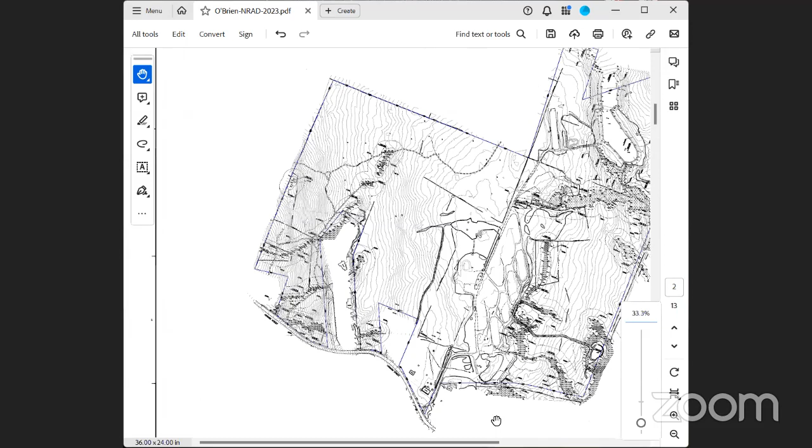Essentially, there was a prior ANRAD issued by the Conservation Commission a long time ago on this. The ANRAD had expired and was never extended or renewed. The applicant had all of the prior flagging by Charles Caron Environmental rehung and submitted an application to simply have the wetlands recertified again. That's basically it, not much else to say. I'm assuming the commission would probably want to walk the site.

The commission has walked the site, or at least some of us have. I went out with Bob last week, and then again with Rich Tremblay over the weekend. I didn't see any flags anywhere. Really? Because I know they were rehung. Yeah, I didn't see any anywhere, and we walked pretty extensively around.

Okay, so if you guys weren't able to see the flagging out there, then perhaps I should ask the commission to do another site walk. I'll make sure that Haley Ward has all the flags. They went out and survey-located all the flags and rehung them, so not sure if anything happened to them or not, but I can make sure that happens.

The only other thing I would point out, I was provided with the prior ANRAD issued from the last time, and that was quite a while ago. There was a certification on the headwaters of the Mulpus as a perennial stream. The applicant is not asking for anything to do with riverfront on this one, simply just the actual wetlands themselves. Anything to do with riverfront or the boundaries of said riverfront would have to be handled under a notice of intent if there's any type of construction proposed within 200 feet of that stream. So that is actually not part of this.

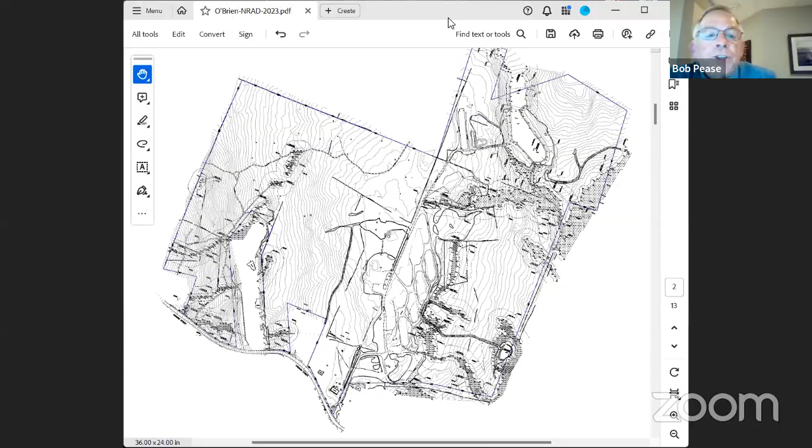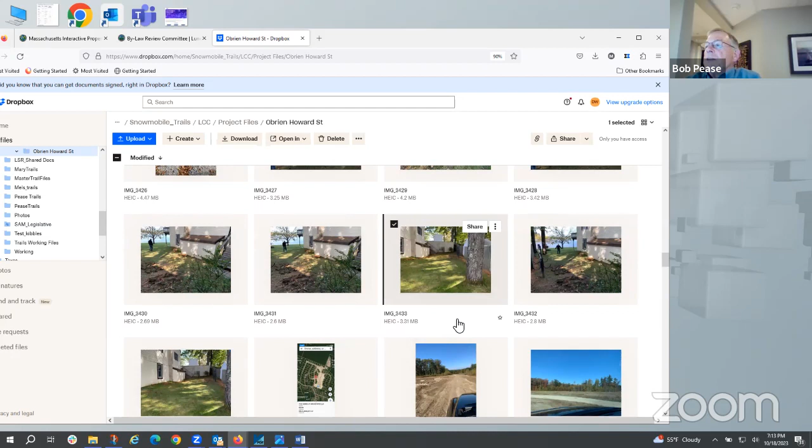At that time we did not have a conservation administrator, so I reached out to Mia McDonald at the DEP, our DEP circuit rider, for advice and guidance. She advised me that the flagging should all be rehung so that we can double check, given that while we have interim administrators now, two interim administrators, we still do not have a full-time wetlands agent.

She advised that we should ask for a third-party review of the wetlands. I just want to bring that to everyone's attention, that I did reach out to the DEP because we did not have a full-time administrator, and that was the advice from the DEP.

In walking the property, you can see there's been a tremendous amount of vegetation removed. The topsoil's been stripped off in a lot of places and separated out so you can see where there's large piles of boulders from screening operations, and you can see where a lot of soil has been transported off the site. Let's put it this way, there's soil that's missing, and I don't see it deposited on the site, so I have to assume it was transported off the site. But that's an assumption on my part, it would need to be verified elsewhere. I think there are some very significant issues here, and that's what I have to say at this time.

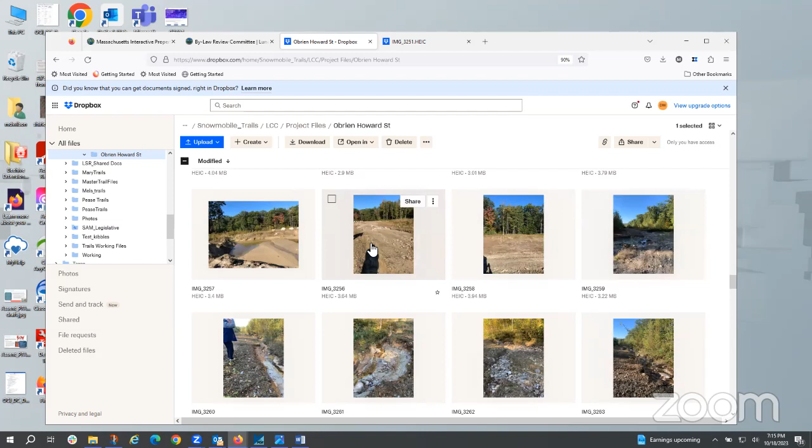While you were talking, I was showing some of the photos. I guess I could make it bigger, and I can show full screen any of these photos anybody wants to look at. Here we have a commissioner showing the scale of the erosion problems. There's just a lot of earth moving down in there that really seems to be uncontrolled altogether.

Yeah, and there are piles of soil, several piles of soil, that have no erosion control, and you can see the ruts coming down the sides of it as well. Yeah, here's that pond that's the headwater of the Mulpus Brook.

Looking for my Saturday photos. Here are Bob, my Saturday photos as well.

Rich Birch has his hand up, Mayor. Ah, Rich, yes, floor is yours. Rich asks: when you were out on site, was any of the erosion into the buffers or the wetland?

Well, I'd have to go back to when the wetlands were flagged to answer that, Rich. It certainly looked that way to me. There's like a berm that the applicant built along the entire western perimeter of the property, and there's also a berm along the eastern side that prevents water from leaving the property until it gets to a certain point. If you look at the wetlands map, it shows wetlands running through the western perimeter. So based on that, I'd have to say yes, that there was erosion through the wetlands.

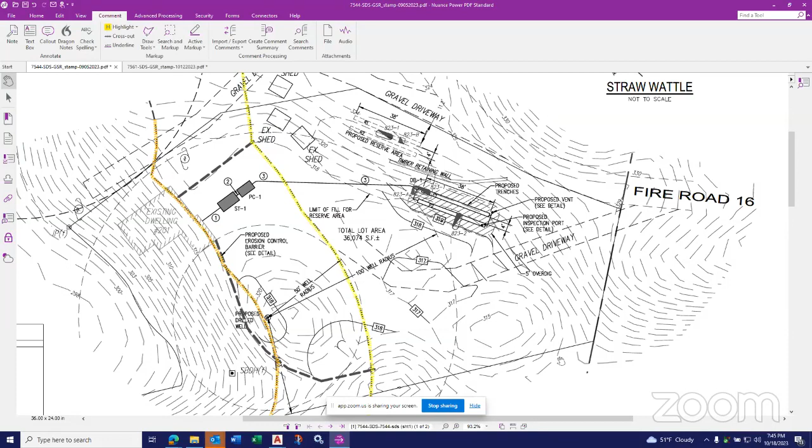Yes, well, this is an existing property. Existing house number 201 is located here. This is off of the end, near the end of Fire Road 16, if you're familiar with that area, right near the Shirley line, which is this line here. And the railroad tracks, the commuter rail, run right through on this side of the property, so it's kind of isolated by itself. There is another house located just to the northwest over here.

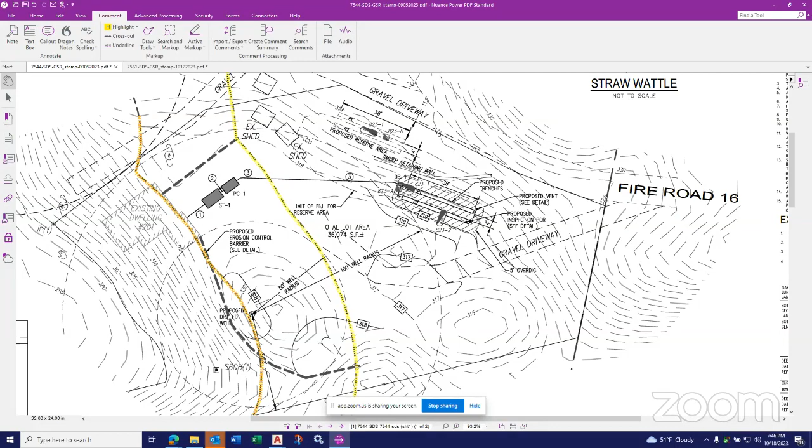The proposal is for a new septic system to be installed up in this area outside of the buffer zone. However, as part of this work, we're going to install a new septic tank and pump chamber in this location with a new building sewer coming out of the house. We're also proposing a new well located in this area. All of those items are within the 100-foot wetland buffer zone, so we've shown an erosion control barrier around the area to encapsulate the work area and prevent any erosion from going down to the lake, down in this direction, which is the cove end of the lake, right in that southeast corner of the property.

So the work's going to involve taking out whatever existing system might be in this area, installing a new tank and pump chamber and the piping, and a trench going up to the leach area, with some removal of a mound of soil here. This is the only location we can put the well and meet all the required offsets, so we had to put it here, and in order for a well machine to get there, they're going to have to knock that hill down so the truck can get in. It's just too steep and too pointy at the top for them to work in that area without excavating it out, and like I said, erosion control around the whole area. So it's really a minimal amount of work. If it wasn't for removal of the mounded area, there would be almost no real site work involved other than installing the tank and pump chamber.

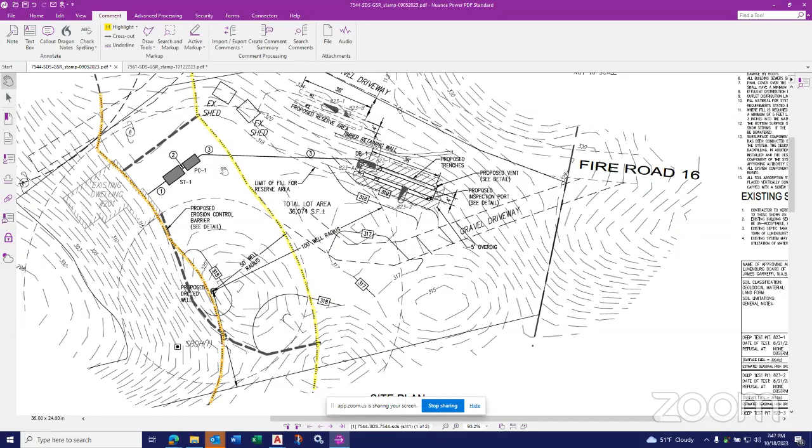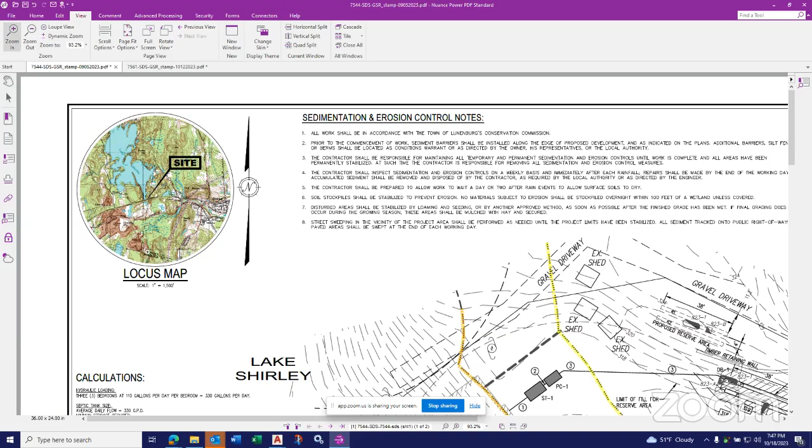Where is the lake on this drawing? The lake is over here. The edge of the lake is right near this 298 contour in this area, almost off the sheet. We should probably open up the viewport a little further to get the edge of it. The lake makes a pretty sharp corner here. We are right in this very corner, the southeast corner of the property, the very last property there. You can see the railroad tracks come by right here, so we're right in the very corner of the lake.

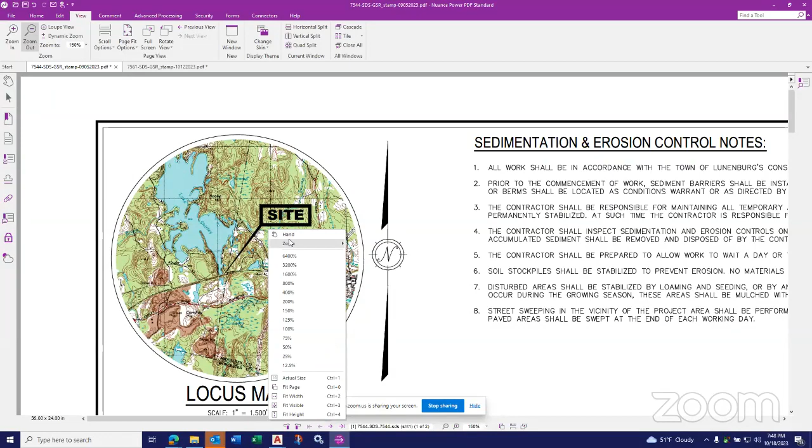And so the two lines that you had shown in yellow on your plan, those were the 50 and the 100? That's correct. The yellow is the 100-foot, and the 50-foot is the orange.

No work is proposed in the 50 between the 0 and 50-foot, except for some grading in this area to level it out. We did have to get into there just a little bit, in order to level this hill down so that a well truck can get in there and put the well in.

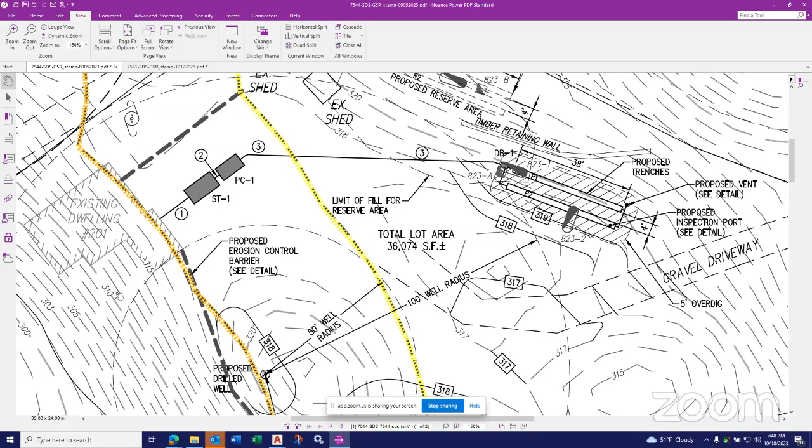Okay, are there any trees or understory bushes that have to be taken down to place that well? Yeah, there are a couple of trees near the top of this mound that would have to come down. I'm not totally sure of the size. The owners are here attending the meeting; they could certainly clarify any number or dimension of trees located there.

Madam Chair, hi, it's Butch McGurn. How are you tonight? Hi.

So as he's indicating, there will be trees to come down on that mound. And I would guess, just a rough guess, maybe over 2 inches, ranging from 2 inch up to probably even 12.

Okay, thank you for that clarification. And there didn't seem to be any designation on the drawing about the trees impacted within the buffer zone? No, unfortunately, at the time the topography was shot, no one was aware that mound was going to have to be removed to put a well in that location, so we didn't obtain the tree locations. Again, we don't typically locate 2 to 10-inch trees; anything under about 10 inches you wouldn't typically locate unless specifically needed.

Understood. Rich, thank you for that. That's actually something that was confusing me a little bit about the drawing. It seemed like that solid line that he last highlighted would have been the edge of the lake or the high water mark or the 50-year flood mark, but it's not that. It's the boundary that's shown, a political line, not an environmental boundary line.

Madam Chair, I myself would like to see it delineated on the plan. I have no problem with the project, you're kind of limited in where you can put it, but we're kind of guessing here where the 50-foot line is, if the well is within the boundary or outside the boundary.

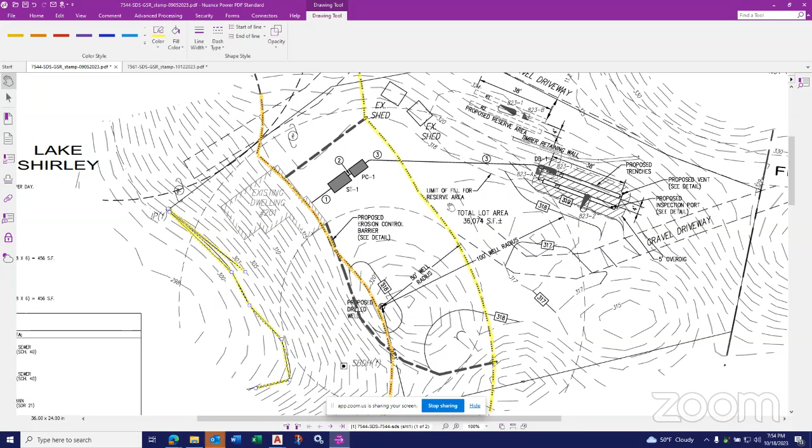Thank you, Rich Tremblay. Madam Chair, thank you. Chris, a couple of questions. Does this map or drawing show us where the existing septic system is? It does not. I'm not sure exactly what's out there, but I think it's a cesspool or something in this area. I don't think there's any known exact location of the existing system.

Okay, what is your plan? Is that going to be removed? It will be removed if it's interfering with the new system, and obviously the Board of Health requires any tanks to be properly decommissioned, crushed and filled with sand and that kind of thing, for safety purposes mostly.

And my last question, around the well, when you're removing all that fill so we can get a truck in there to put in the new well, what happens to that fill? It could be used, it's probably all mostly sand. Certainly they'll be needing some sand around the proposed system area to meet Title V requirements, which that sand probably does, so certainly some of it could be used for there. I don't know what the plans are for any of the rest of it. It's really not that much there, a few truckloads, maybe 2 or 3.

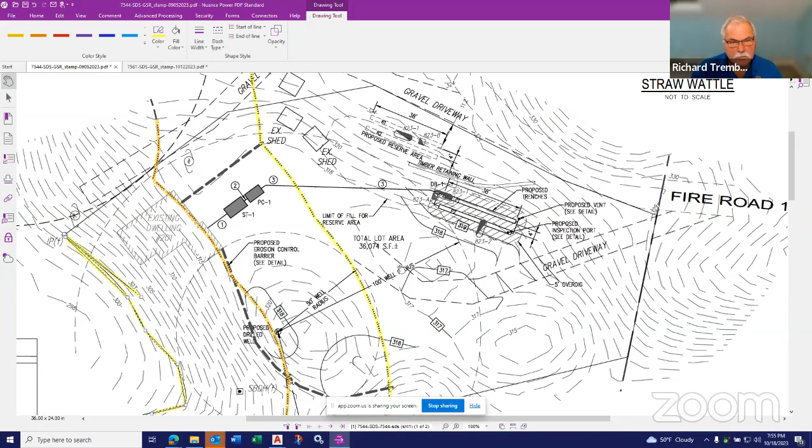Okay, thank you, Chris. Thank you, Madam Chair. Do we have any other questions or comments from members of the commission? Not seeing any hands. Butch and Joanne, you have your hand up?

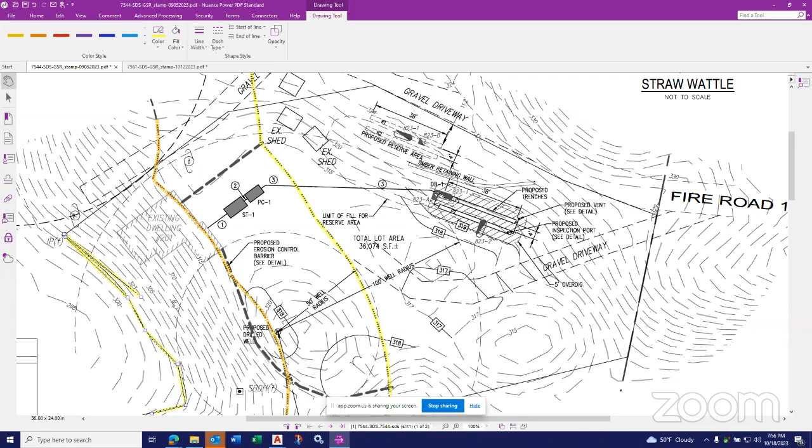I do, Madam Chair. Just to point out, the level of the lake is in fact that heavy dark line that was highlighted. That is in fact the edge of property because it's a retaining wall, an old concrete retaining wall, that delineates the property from the lake. So the lake level at that retaining wall right now is at 2 feet.

Thank you for that. And then to answer Rich Tremblay's question, there is an old abandoned system. There's probably about a 50-gallon barrel that's buried in there, and it does have an elevation out to an old sand trench. It's roughly located at the number 1. Thank you, Butch.

So that has the barrel over it. Is that what we saw this weekend? Is that what you're saying? Yes. Okay.

And thank you for clarifying where the edge of the lake was, but then that really begs the question of why there's still gradient lines below the level of the lake. That makes no sense to me. Well, I can honestly say lake level on the entire town assessor's map is at 300 and the dam spill is at 301. We know that from the property survey that we all did together 2 years ago. So apparently the lake somehow has a void here in your area, according to the drawing.

Anyway, thank you for that clarification. Bob Pease, you have your hand raised. I did. I had the same question you did.

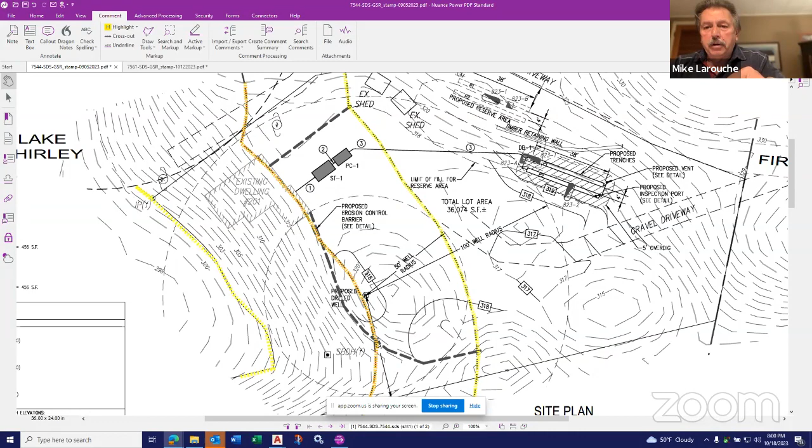Yes, that has been issued. It's 208-1309, and there were no comments. Thank you so much.

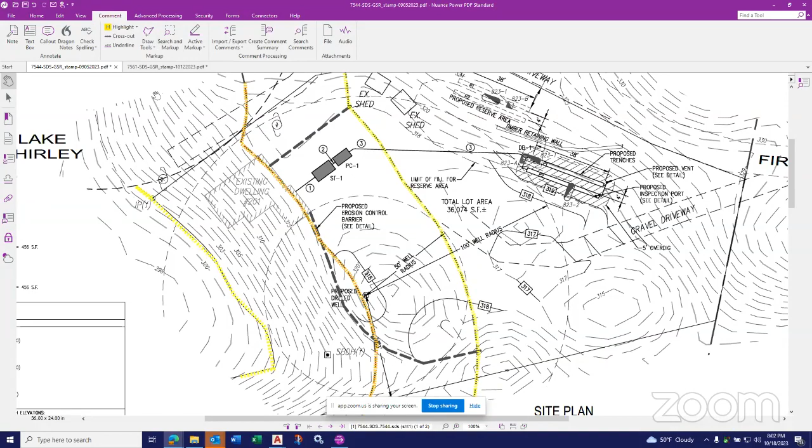The only other thing I'd recommend, since we're sitting at the very top of a steep hill and have to account for all the runoff, is staked hay bales and silt fence, or staked wattles and silt fence. I think you're just showing staked wattles. Yeah, I don't think that'll be enough—I only have the wattles shown, but we can add silt fencing to that. If we can get buried and staked silt fence along with the wattles, that would really offer protection, since we've been in a fairly rainy pattern, and you still have to account for the water coming off once that gravel is opened up at the top of the hill.

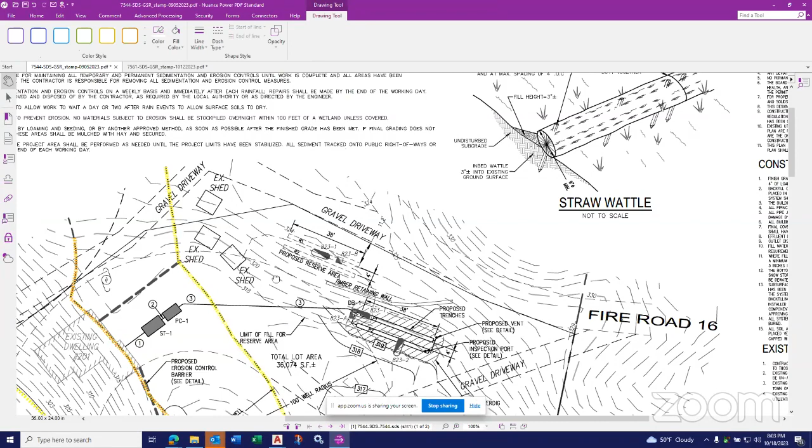Understood. And I brought up the overhead, and the edge of the lake still doesn't really match the way you've got the wall drawn in there, so I'd like to have it rechecked. Understood.

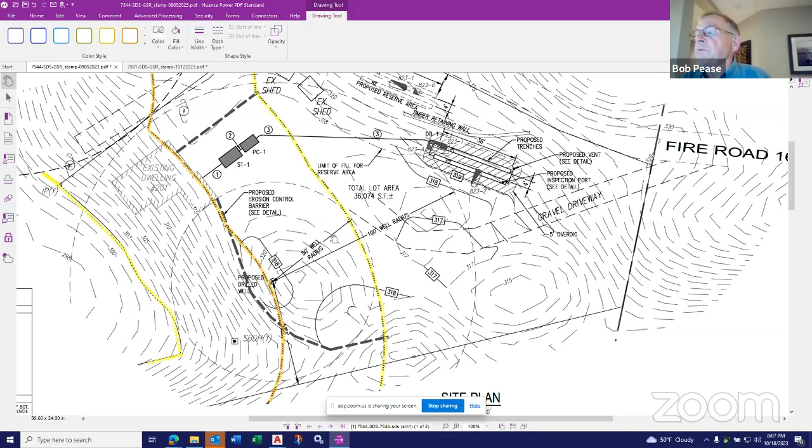Anything smaller than that is more of a sapling, a baby tree. Fair enough, that sounds reasonable in my opinion too, Bob.

I'm going to put it to my commissioners to raise their hand if they have an alternate opinion, and I'm not seeing any. So does that give you some clear direction, Chris? Yes, it does. Thank you.

So will November 1st be enough time to make those updates? I believe so. I'm looking for a motion from my commission to continue this to November 1st.

So moved, Rich Birch. Second, Jeff Viviano. Second, Rich Tremblay. Okay, so I have a motion by Rich Birch and a second by Jeff Viviano.

We'll do a roll call vote. Rich Birch, aye. Mike LaRouche, aye. Jeff Viviano, aye. Richard Tremblay, aye. Chris St. Germain, aye. Bob Pease, aye. And I for myself. Okay, we have continuation to November 1st.

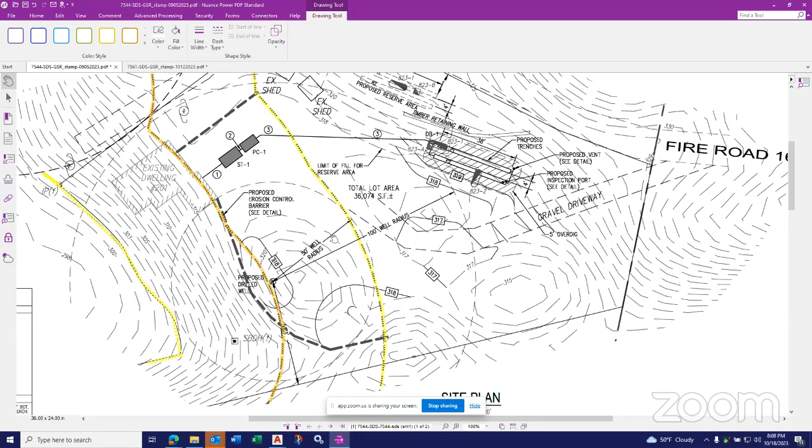Moving along to our next hearing. Pursuant to Mass General Law, Chapter 131, Section 40, as amended on the Town of Lunenburg Wetlands and Municipal Bylaws, a public hearing on a notice of intent by Richard Tremblay for the construction of a replacement septic tank at 386 Sunset Lane.

Madam Chair, I'll be recusing myself. Okay, so why don't you, do you have drawings to share, and do you want to take us through what you're doing down at your property?

Jack Maloney from Dillis and Roy. I am representing Mr. Tremblay tonight. Very good. Do I have permission to share the screen? Indeed you do, thank you.

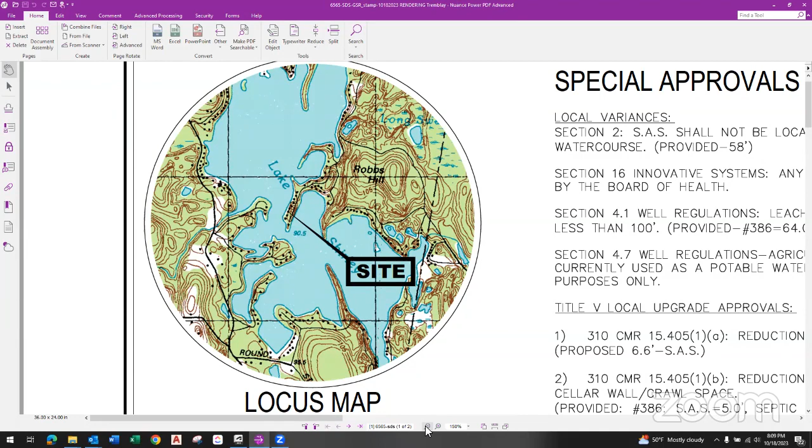All right, can everybody see that? Yes. Okay, so locus map, Lake Shirley, Sunset Lane. We are roughly right where my hand is now, about 4 houses back from the very tip of Sunset Lane. Sunset Lane runs right through the middle of Mr. Tremblay's property, as noted in the gray. Property lines are delineated in pink. Lake Shirley on this side, and we also have Lake Shirley on the other side.

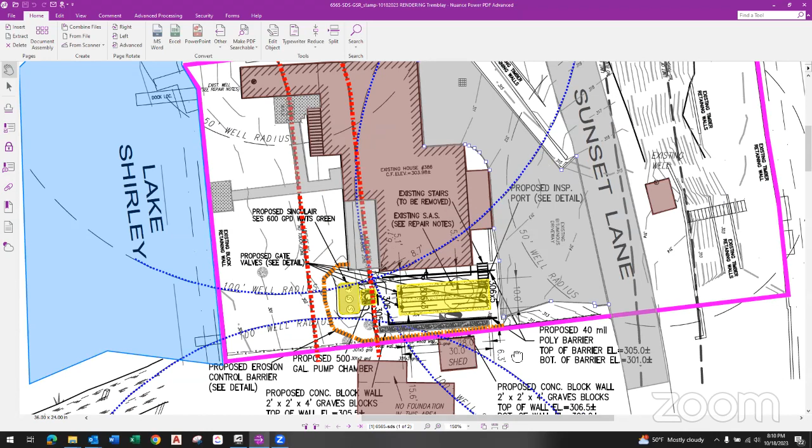Mr. Tremblay currently has a 1,000-gallon septic tank going to a leach pit in this clouded area. Let me blow it up a little bit. And that has failed a Title V, given the depth of the system in relation to the groundwater table.

So he came to us to design a new system, and what we have in front of you is pretty much what we came up with. The 1,000-gallon tank and the leaching pit will be pumped, crushed, removed, and replaced with Title V sand as needed. The old septic tank is going to be replaced with a new system, called a Singulair Model 600 Green.

The plan that we originally submitted to the commission with the notice of intent has changed recently due to the Board of Health meeting we had on Monday night. The original system had a 1,500-gallon poly tank to a 500-gallon poly pump chamber, and a bit larger footprint for the septic system. But after we progressed through the Board of Health hearing, we came to the conclusion that we should put in one of these Singulair tanks.

We have used these on a couple of sites this year with the Board of Health and with the commission. 86 Oak Ridge Drive was one of the latest ones, and before that was 1074 Lancaster Ave on Massapoag Pond. Similar system, this just happens to be a plastic tank versus the concrete tank. Same with the pump chamber. We have used, or are proposing, a 500-gallon poly tank.

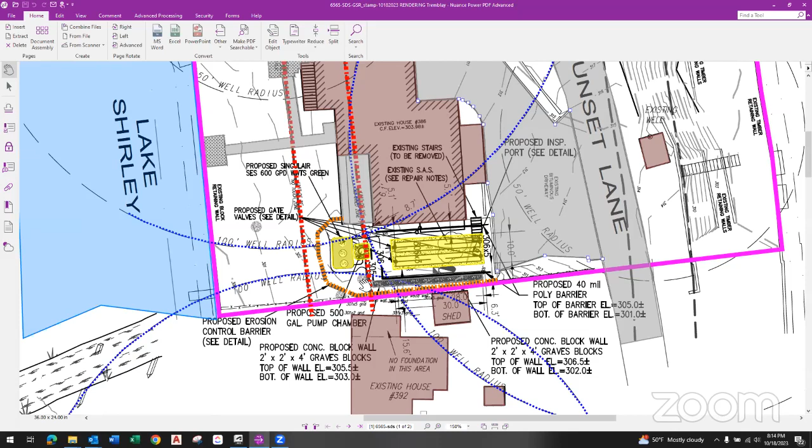We do have a couple of trees in this area, one of which we are working around -- we don't want to take any trees down here. That's one of the reasons we put the 40 mil poly barrier in an L shape, so we can cut the grading down a little bit steeper without causing issues for this tree in the future.

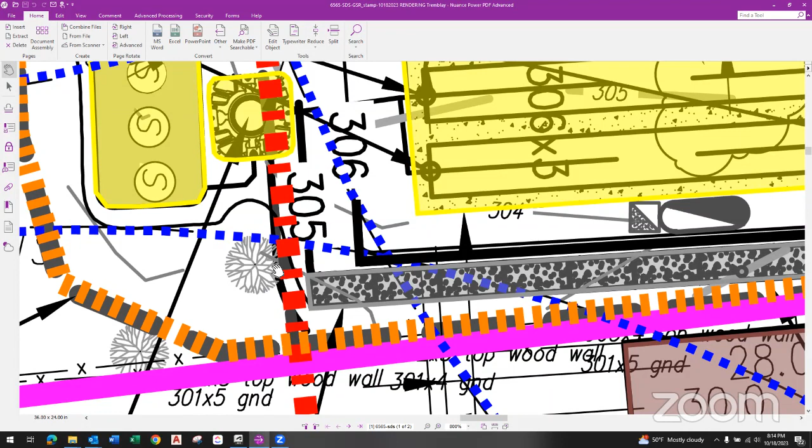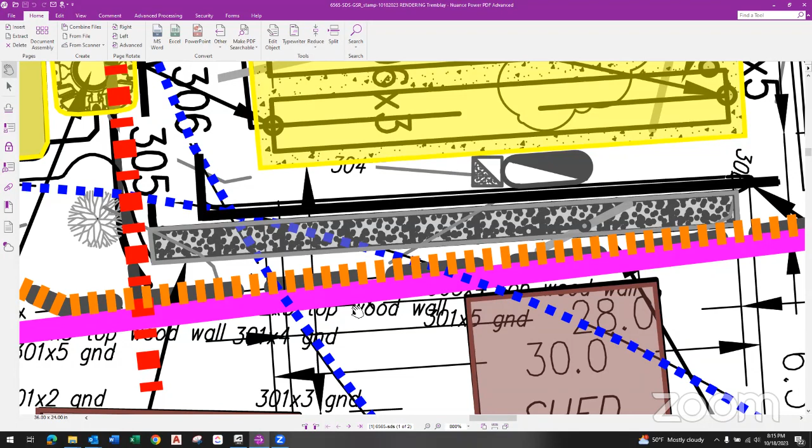This wall is going to be stepped. The top of the wall itself is at 306.5, with a 6-inch cap on it, so the block wall is at 306, and the cap brings it up to 306.5, up until the last block, which is a foot lower because the grade is tapering down. So we have a gradual slope area on the top, going from 306.5 to 306.3 to 306, and then down on a 2-to-1 slope after that across the tanks.

We have proposed wattles, shown in this orange line, to wrap the system. There is a stockade fence running along the property line here, and those wattles will be placed along the bottom of that fence. This first red line is the 30-foot no-touch zone, and then we have the 50-foot buffer zone marked with the second red line.

Any questions or concerns from the commission? I'd be happy to answer.

First, comments. The colors and the detail in the drawing are super helpful. It's really clear, and I do appreciate the time and effort it takes to do that. So thank you for that.

I was out there this weekend. It looks fairly straightforward as far as I can tell, so I didn't really have any questions or comments. I'll open the floor for my fellow commissioners.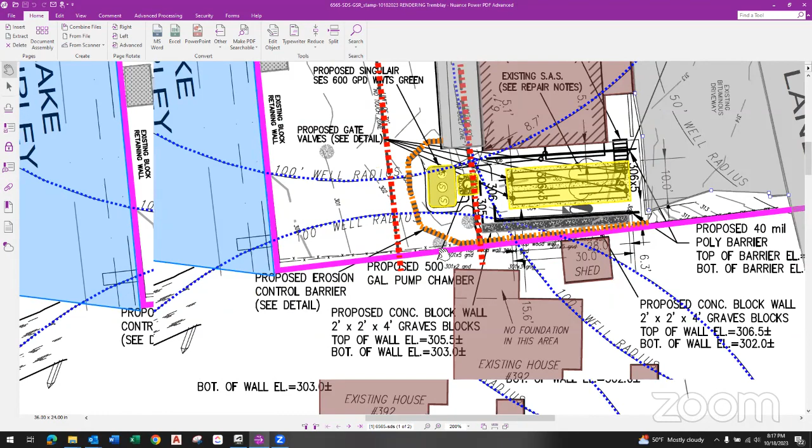Okay, so 304.4 is the bottom of the C33 sand, and then 304.9 — so there's half a foot of C33 sand going in. That 304.4 would have an interface with Title V sand down to the naturally occurring parent material that's below the old top and subsoil. So again, it's a very shallow system, very low profile versus like a Presby system or a traditional stone and pipe system.

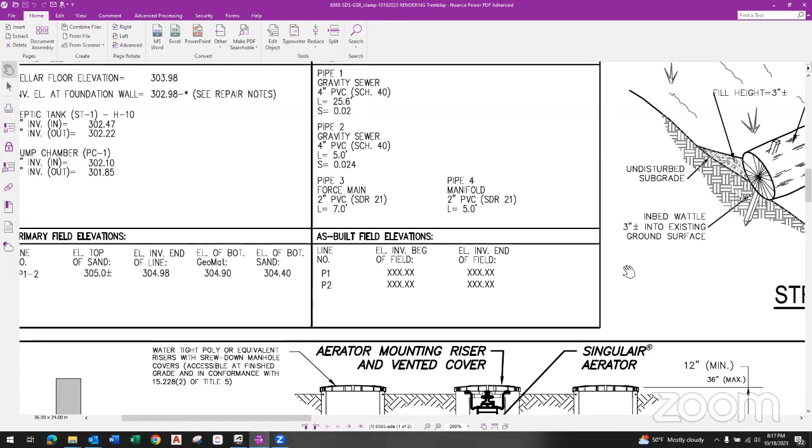Okay, so how much material's on top of the matting that you're backfilling with? About a foot. Okay. And the Title V says we have to have a minimum of 9 inches over this system. Yeah, I know the schematic said minimum of 6, but you don't have a problem with these freezing?

No. Okay. And is there a check valve or something where you have basically a 1 foot slope from uphill to downhill and then another foot down into the pump tank? That if it does happen to freeze up in there, then the effluent's not percolating into the sand. I just want to make sure it's not flowing back into the pump chamber. So what happens is there's a weep hole that's drilled in above the check valve inside the pump chamber.

So when it does shut off, anything that doesn't get absorbed into the system will backflow, or whatever residual is left in the force main and manifold. And all pump systems are designed like that, regardless of whether it's a geomat or stone and pipe system. Okay, yeah, other than that, it looks pretty straightforward.

So, and you have just staked wattles. We do. I think along the fence is probably the best scenario. If the commission so wants, a silt fence along that bottom slope from where it starts to bend out back to the patio area. I don't think Mr. Tremblay would have any issue with that. It's not a steep slope, but there is a slope there, so I do understand that concern.

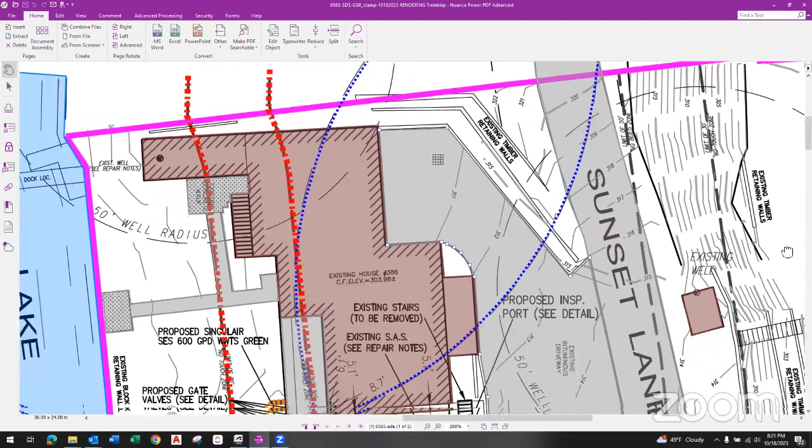I know it's a pretty tall wall from the driveway there. I've talked to a couple of contractors over the last week or so from when we first started designing this. There's no access to the north of this property due to how both properties are set up. Mr. Kullberg, along in here, there's a series of retaining walls that step down towards Richard's site, and then Mr. Luck has his property over here, and I'm not sure if there would be any form of access from his property.

So what we looked at is we talked to a few companies. I talked to another one this morning while out doing some testing in Concord, and they said what they've done in the past in situations like this is they've actually dropped a mini excavator down, and for a situation like this, a mini excavator would probably do all the work needed down there. They would have another machine sitting up in a staging area in the driveway, just lowering blocks and parts and pieces, sand over the top of the wall, and the other machine would put it in place. Again, that's one of the reasons we're using the poly tanks versus any concrete tanks, just for ease of installation.

The poly tanks, the septic tank we're looking at, are about 600 to 800 pounds, which a little mini machine and a couple guys can move. The poly pump chamber is a little bit lighter than that. So because of the situation, we try to minimize big equipment to get down there.

Yeah, no, I understand. That's a pretty tight spot back there. I appreciate the little cutout there to save the tree.

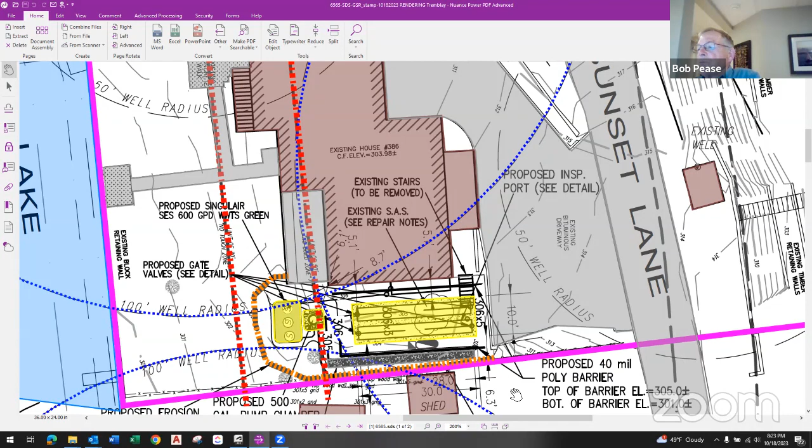I would just like to say I appreciate the colors, it seems all very well done. I don't have any concerns at this time about this project at all. Thank you, thank you.

Or any other questions or comments from fellow commissioners? Okay, are there members of the public that have any questions or comments?

Carl Luck, you have the floor. Hello, one second, reduce the noise.

Sorry about that. Carl Luck, 50 Sunset Lane, where we own the abutting property to the south, where it says shed. That's our property. I have a couple areas of concern. Unfortunately, I didn't get to see this print. I know Jack had been working on it feverishly to get it for the meeting. Unfortunately, I didn't get a copy, so I'm a little on the fly here.

The system itself looks great. The changes that were made after the Board of Selectmen, Board of Health on Monday night are excellent, and it does remove one of the major concerns. I'd like to try to drill down a little bit more into the wall that is shown abutting our property line and the fence, as the engineer said.

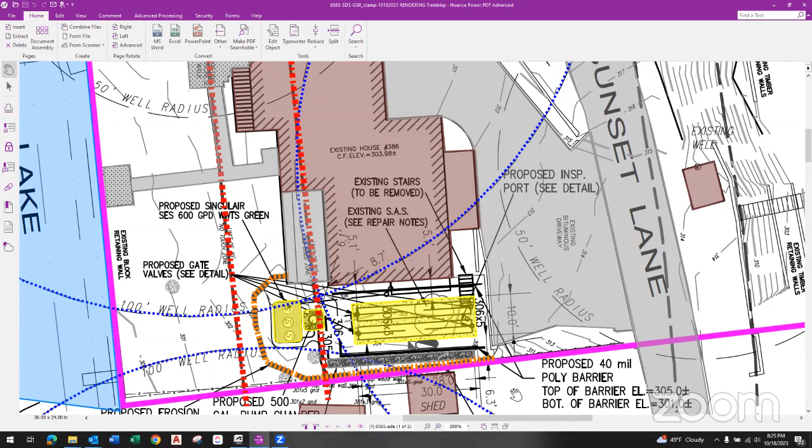The note, this is the perfect view for at least the start of the question. If you could move, I could see a little bit lower. I'm looking for the note that says the block wall. Thank you, perfect. There's been a little change here, and I'd like to understand why.

The bottom of the wall on this print says it's at elevation 302. The print that was presented to the Board of Health was 301.5, and I believe that was based on Dillis and Roy doing a survey of the level of our property just at the bottom of the fence. My understanding was that it surveyed out at 301.5, and that's what that used to say. I'm wondering why it's now showing the wall being a half a foot above my grade.

But the wall has been pushed further away from the fence. If you remember on Monday night, the original wall was parallel to the fence, which raised a concern that if we were to put that wall in, the fence would have to come down, and there was a whole concern about that on your side of it.

So now with the system getting 25% smaller than it was Monday night because of the treatment tank, we have the ability to push the wall further away from your property. So not touching that fence, or having any issue with the earthen material from the left corner of the shed as you're looking down towards the lake, doesn't become an issue, because we can dig right through that material on Mr. Tremblay's side of the fence and insert those blocks without any issue of collapsing on your side.

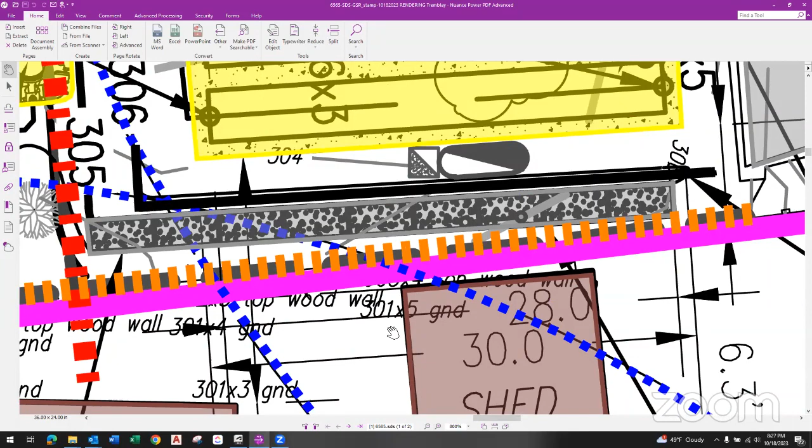301.5. Can I confirm? So your side of the fence is fairly level, Carl. It's 301.5, 301.4, and 301.3 were the spot shots I took right along the bottom of the fence. That's great. And then I did take some spot shots along the top, and it was about anywhere from a foot to a foot and a half higher.

This being where my cursor is now, the foot and a half higher at the ground elevation on Richard's side. Oh yes, yeah, that's correct. But so it seems there's going to be a slope from the 301.5 up to the 302 at the wall, or is it more of a slope than that? Whatever the grade is right on the other side of the fence is going to remain the same, is basically what's going to happen. There's going to be a gap between the fence and the wall that's facing your property.

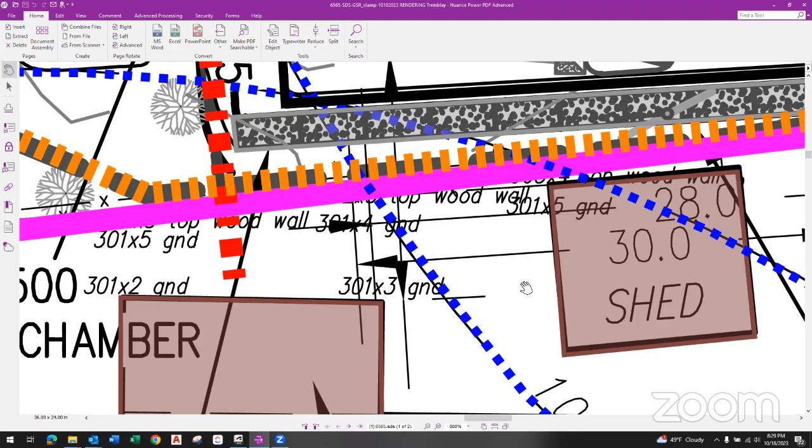So there'll be, because as you say, the fence is extended, and that soil is being held back by 2x6 or 2x10 or 12, whatever pressure-treated boards, creating the holdback for that soil. So the soil will be the same level when this is done as it is now on the Tremblay side of the fence. Yep, exactly.

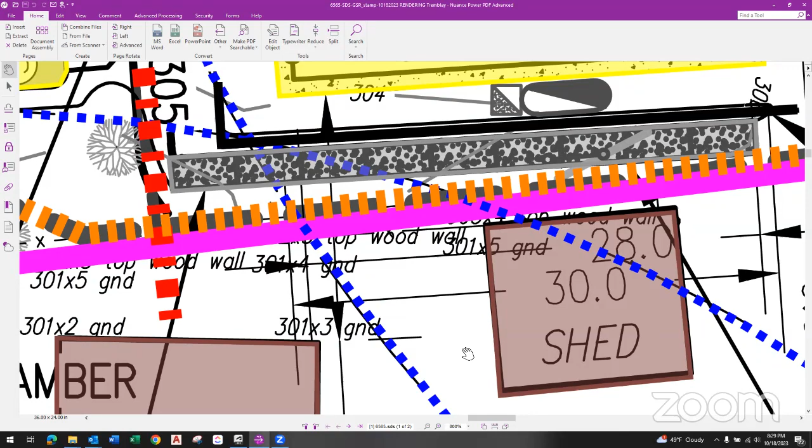And it'll be a very short amount of soil. Okay. And the bottom of the wall, where it says 302 on the print now, that'll be quite a bit below grade then.

Up on this side, yes, and as you come down to here, it won't be. This is right where my hand is, that's a 304 there. So you're looking at maybe a foot below grade on this side. But if you look at the 40 mil poly barrier, it still goes down to elevation 301. So that hasn't changed. Yes, good.

I did notice that. So, but at that point where it's 304, as you just pointed, the top of the wall is still at 306.5. Yep. And the bottom of the wall is at 302, so it's... 2.5 feet from 304 to 306.5.

No, but after fill, that's 306. Fill on the inside is 306. So there's a half foot cap sticking up, which we had talked about the other day when you came into the office — we have a half foot cap on top of that wall, which for runoff purposes, even though we have runoff from right to left, if anything comes laterally towards your property, it'll get caught along that wall and pushed along it towards the lake.

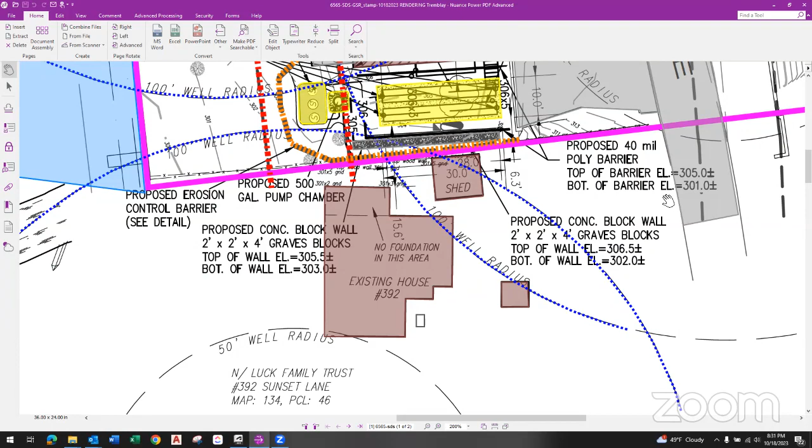So on the second page, there's a detail of that wall. Could we go over there for a second, please? Oops, sorry. I don't have this. Oh, here it is. Yep, I do have it. Oh, sorry. Yeah, you're better than you thought.

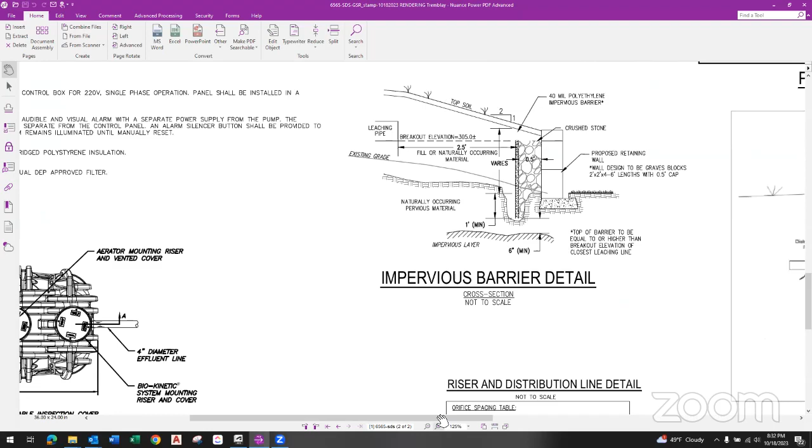Okay, so here, great, this detail has changed. That's marvelous. So now it does show that it's going a bit above the grade, whatever it is. So thank you very much.

And the note says... where did it go... existing grade. So that note there, existing grade, is which grade? The grade on our side of the fence or the other side of the fence? This here? Yeah.

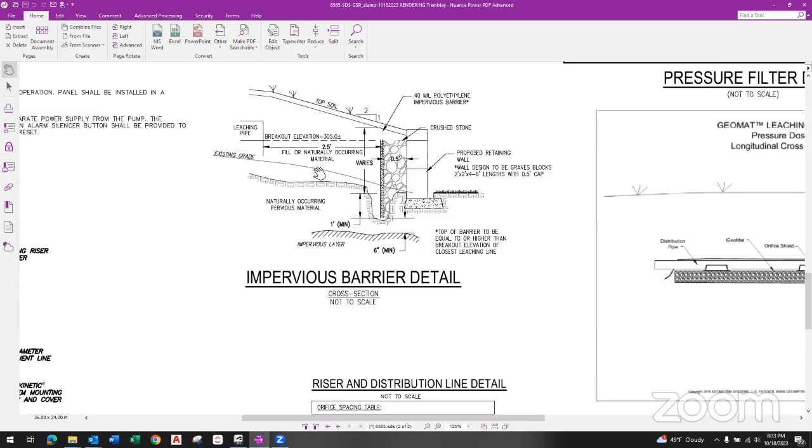Where the cursor is, Carl? Yes, yeah, that existing grade. Which grade is that? So that's the existing grade that's underneath the leaching field. Again, this is just a generic impervious barrier detail. None of these elevations are drawn to scale. So this is basically showing how the impervious barrier fits in relationship to the wall that we have here.

Okay, I understand this is a generic drawing, and you've made it more specific to this project, which is great, showing 2 blocks and a cap. But if we look at this, I still think we should indicate which grade it's talking about, because that's the place where it shows that it's below grade, which is important.

I guess I'm lost in what you're asking for. When it says existing grade, which grade is it talking about? The grade on the Tremblay side of the fence or the grade on the Luck side? Tremblay side.

We're not working on your side of the property. We're working on the Tremblay side of the property. So again, this is just take the existing grade right out of there. This detail is to show how the impervious barrier is to be set into the ground and in its relationship to the proposed retaining wall.

Yeah, so it might be just get rid of that existing grade, because it's very confusing, because it doesn't look at all like that. Again, it's for the impervious barrier detail and for the wall. It's nothing to scale, so you can't go by that if you're trying to figure out

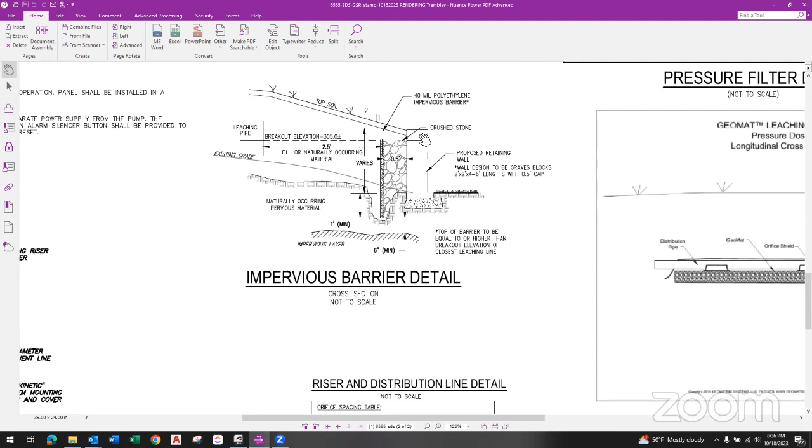So there's a step up to 303. It goes for a little bit, which varies over the length of the wall, because the wall is not parallel to the line. And I don't know, could you take a guess or tell how far it is from the fence to the wall in that area, that 18-inch area?

Yeah, right at the corner of the fence. I'm at the corner of the shed. Yep, right there. So from the property line to the edge of the wall is just shy of 2 feet, right where I show it. Okay, great, perfect. So it goes over flat for 2 feet, and then there's a wall.

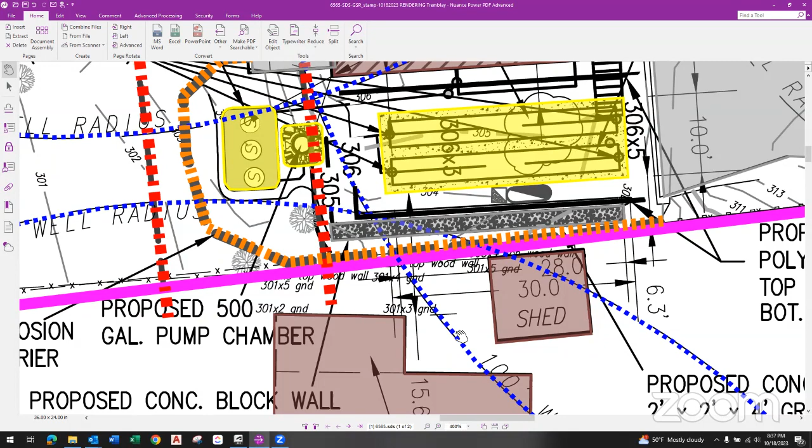And at that point, just to confirm, the bottom of the wall still goes down to 302. Correct. Beautiful. And then it steps up, whatever's left, 3 feet of block will be showing in that area. So we go to the fence from our level, we step up 18 inches, go a foot.

So back, if you look at this right here, 304 comes in and then it wraps, comes back down. Yeah, okay, so the elevation of the ground between the proposed wall and the fence currently is 304. Yes, so good, there's going to be 2.5 feet that's showing on your side of the fence between the fence and the wall. Got it.

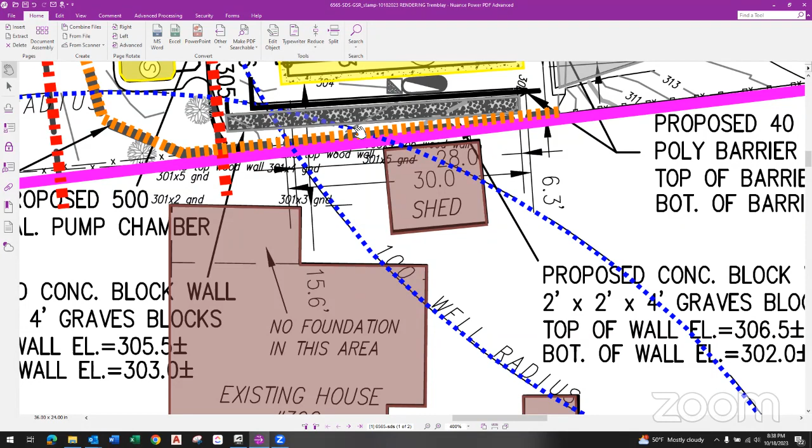Okay, good. Yeah, the key thing, which is great, is it still goes down. How high it goes doesn't matter to me. It clearly matters there, but as long as it goes down far enough so that nothing can ever come underneath it, that's great. And like I said, the poly barrier still goes down.

Where is it? The poly barrier still goes down below that to a 301 elevation. So it goes down even half a foot below the elevation on your side. Beautiful, beautiful. Thank you.

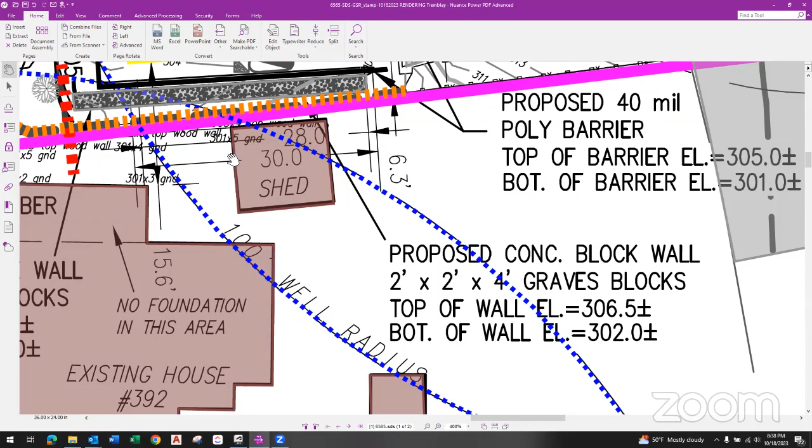Okay, so I think that is all clear to me. Appreciate the patience. And the other concern I had regarding the wall was relative to the runoff, and I think you've addressed that with the cap that's at least 6 inches proud. So I don't see the runoff as an issue anymore. And when we get to the end of 306, it slopes down kind of gradually.

And I don't see a problem with that. So I don't know that there's any need for any other stormwater issues regarding runoff or anything. I don't think you do either. You would have put them in there.

Okay, so that's wonderful. The only other thing of just concern I'd like to throw out, and actually I'm sure getting some inputs from the commissioners, I'm sure I would disappoint some of the commissioners if I didn't bring up trees.

So what's not shown, I understand the tree of discussion here, and the other tree is even further away, so I don't see any issues there. But there is a tree that's not on the plan, to the right of the shed. It's literally touching the overhang of the shed, about midway in the shed. It's about 4 feet from the property line, and I don't know how much more to add, a foot or so maybe, Jack, to the excavation.

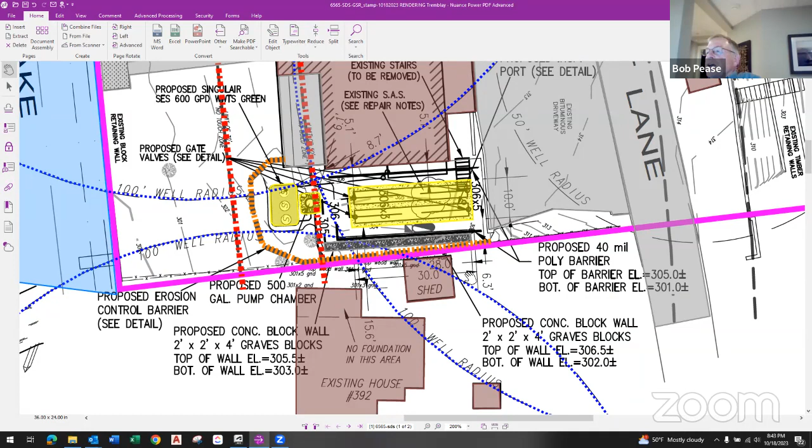And what type of tree is it, Jack or Carl? It's an oak, I don't know which color oak. Yeah, I generally believe it's a black oak. Generally oaks tend to have a tap root. And what's the elevation there where the stump's going to be?

I don't know what that elevation is on the other side of the fence, Rich. I didn't take any shots down there. I think it's a lot higher. The property on the other side of the shed, between the shed and Carl's house, is 392. It's definitely lower, but I think on that higher side, and I may be misspeaking, I think the ground is a lot higher over that side.

Yeah, Jack, you're exactly right. There is nothing below the fence that holds it back, so after you get past the fence, the elevation is the same on both sides, whatever that is. Yeah, unfortunately, without seeing the exact conditions, I guess I wouldn't worry too much about it if it was an oak.

At this point, Carl, it has a pretty good canopy area around the shed and on your side of the property. The roots that do get cut over there, the tree will work vigorously to replace. Okay, great, I appreciate that, so I wouldn't worry too much about that one. Okay, super, I appreciate your sharing that with me.

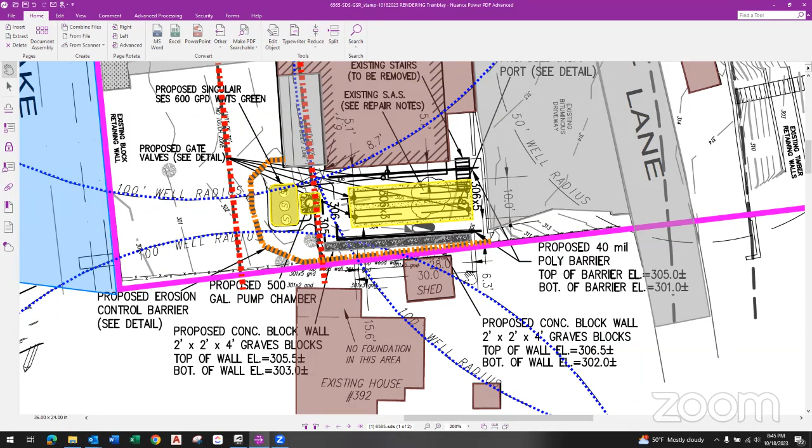Okay, seeing none, I think I am looking for a motion to approve with an order of conditions that the silt fence get added in addition to the straw wattle. So moved. Second. Okay, I got a motion by Bob Pease and a second by Jeff Viviano.

Okay, we'll do a roll call vote. Rich Bursch, aye. Mike LaRouche, aye. Jeff Viviano, aye. Chris St. Germain, aye. Bob Pease, aye. And I for myself. For the purposes of this vote, Rich Tremblay is recused from being a commissioner, because it's his property. So it is that the NOI is approved with silt fence and straw wattle as the order in the order of conditions.

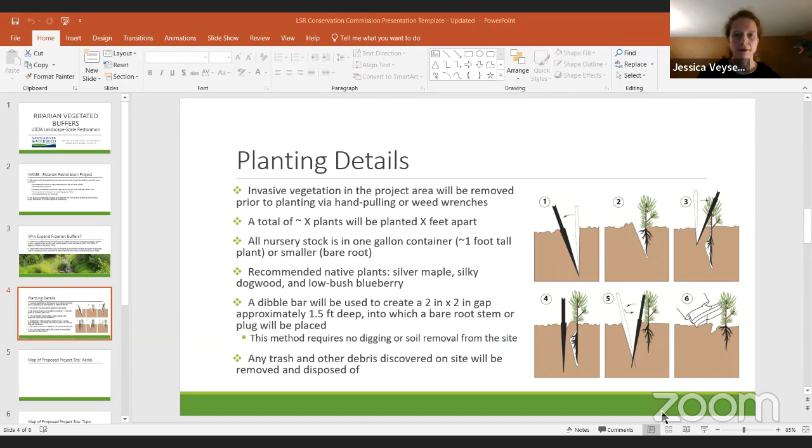The only other image I have to share is the aerial shot here — can you see this as well? Not yet, oh you can't see it yet. Maybe you have it on a different screen. Yep, okay, hold on one sec.

That's really all that I have to say. I think it's minimal disturbance, and it could help stabilize these banks a little bit, but I'm definitely open to questions or comments you may have.

I think it's an excellent project. I had the privilege of walking down there with Rich Tremblay this weekend, and I think it's a great thing. When we were there, there were a lot of leaves in the photos, but when you're there in person, you can tell how much of the topsoil has been washed away and how many roots from the trees that have remained are bare and exposed. So I think this would be an excellent project.

Is the Nashua River Watershed Association still taking applications for this grant? Absolutely, I was going to end with that. We're sort of desperately looking for sites, actually. So if you know of any sites that might have potential, we're very interested to hear about them. You could send me an email, or my colleague Marissa, who was corresponding with you originally - she's the one who submitted the application. If you know of sites right now, you could tell me and we could begin the investigation from our end right away.

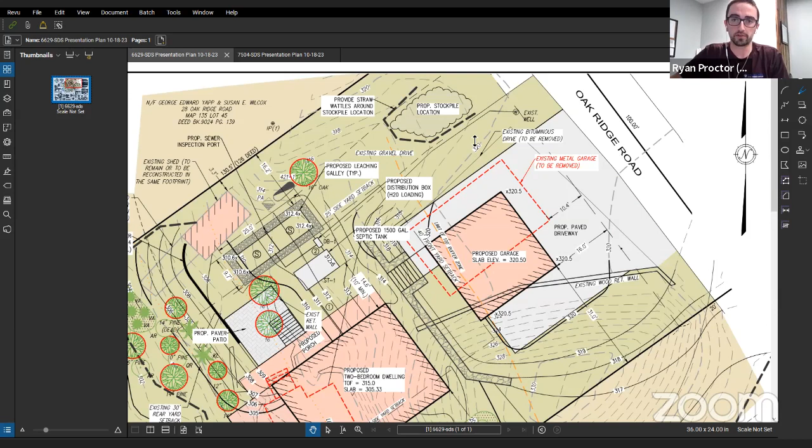Okay, so the first item I mentioned was the stockpile location, brought up at the last meeting. I showed a location up towards Oak Ridge Road, outside of the 100-foot buffer zone, which is this orange dashed line here - this is an existing disturbed area. So I showed that area outside of the 100-foot, and then showed some straw wattles around that stockpile location to provide additional erosion control.

The second item was relative to the landscaping. As a refresher, we're proposing to take 9 trees for the project, one of which is dead, but we included it in our calculation anyway. 3 of those trees, circled in red here, are within the 30-foot wetland buffer.

To provide mitigation, we're now proposing a 2-to-1 replacement. Within the 30-foot buffer, we're proposing 6 trees total, roughly in the same locations as those being removed. We have a red oak, another red oak, and two red maples scattered along that area, plus two additional trees on the southern portion of the site where the existing house is being removed, including another oak and maple. So we're taking out 3 trees from the 30-foot buffer and replacing them with 6.

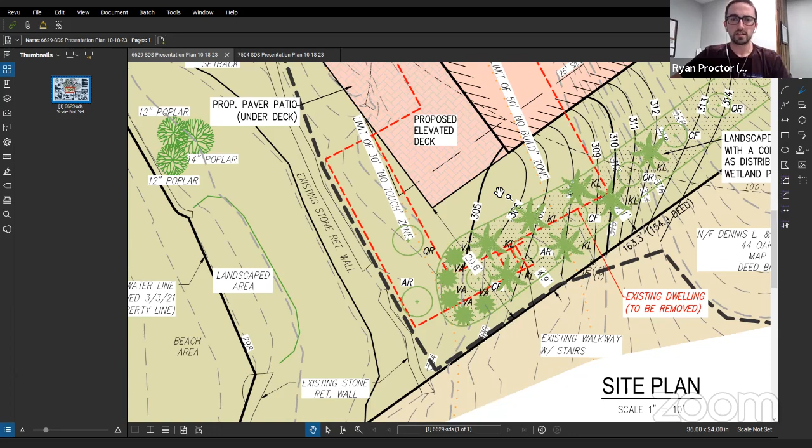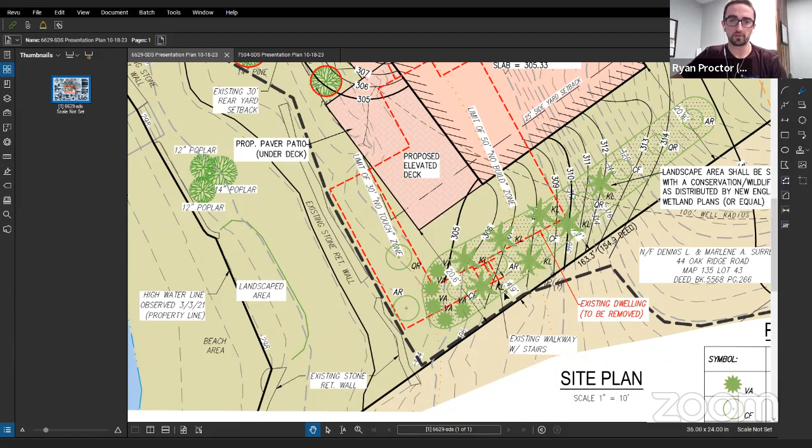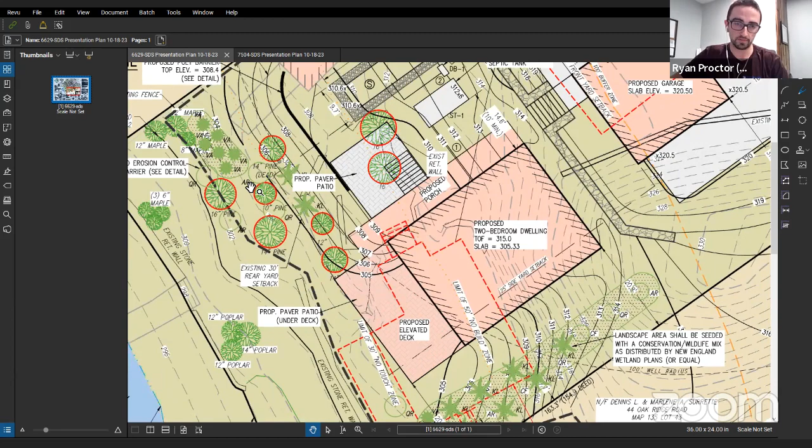For the remaining 6 trees between the 30 and 100-foot buffer zone, we're proposing a 1-to-1 replacement. We have a combination of dogwood trees, an additional oak, and a maple tree, installed between the proposed house, shown in salmon color, and the southern property line. In addition to the plantings, for further stabilization we have low bush blueberry and mountain laurel along the property line and south of the proposed septic system along the slope.

Those were the only two comments from the last meeting, and the only plan changes since the last hearing. If there's any questions or anything additional, I'm happy to address those now.

It's also consistent with the notes I had from the previous meeting. Thank you for that, Ryan. It answered my concerns specifically about the tree replacement schedule. Are there questions or comments from other members of the commission?

I think it's a good plan, especially the 2-to-1 replacement. I think that's very proactive and a good effort forward.

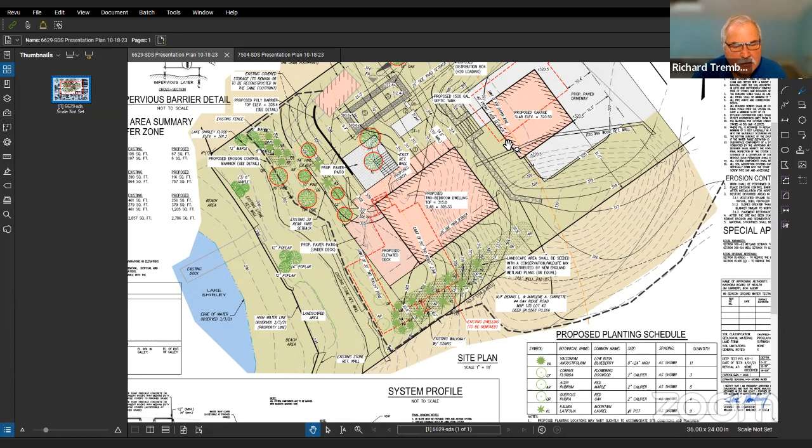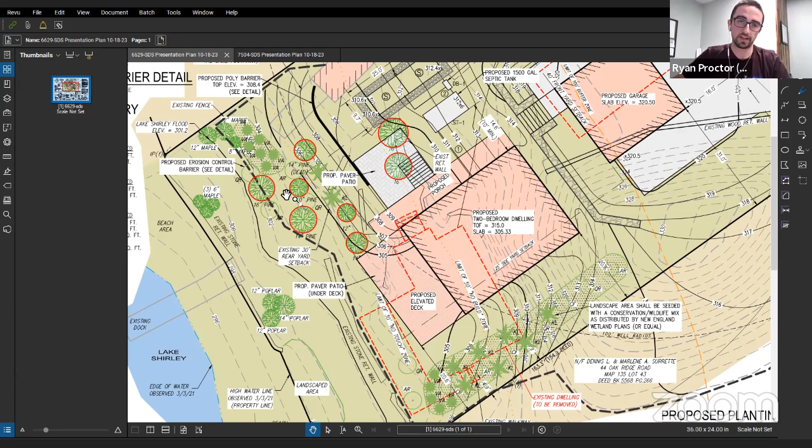Thank you, Chris. Rich Tremblay, you had some questions? Just a question, thanks Madam Chair. Ryan, down by the 30-foot, the trees coming out, are we taking the stumps out too? We are. There's going to be some grading there for the septic system, so that is the intent to take the stumps out. But we will be replacing in those locations with new trees to help restabilize those areas.

No other questions, Madam Chair. Okay, I am not seeing any other questions by members of the commission. Are there members of the public that have questions or comments? Okay, I am not seeing any further questions from members of the public.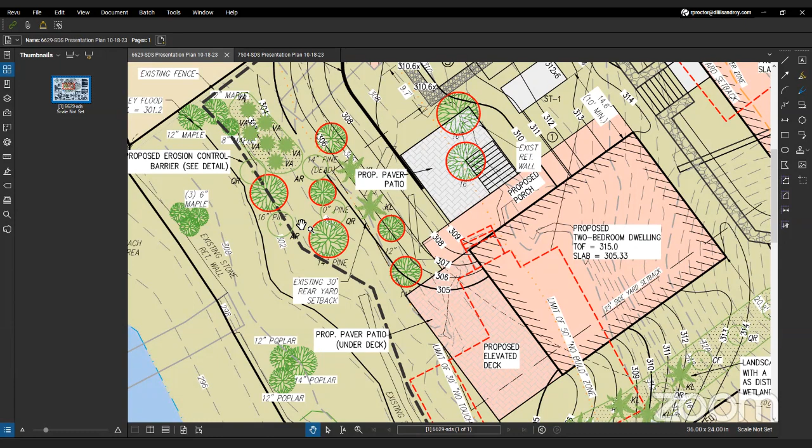Brian, would you remind me what you have for the silt or erosion control barrier there? Yep, we have the straw wattle with the silt fence. That was a comment at the opening public hearing that we addressed at the last meeting, so we have a detail shown here on the plan. Okay, thank you for that. You're welcome.

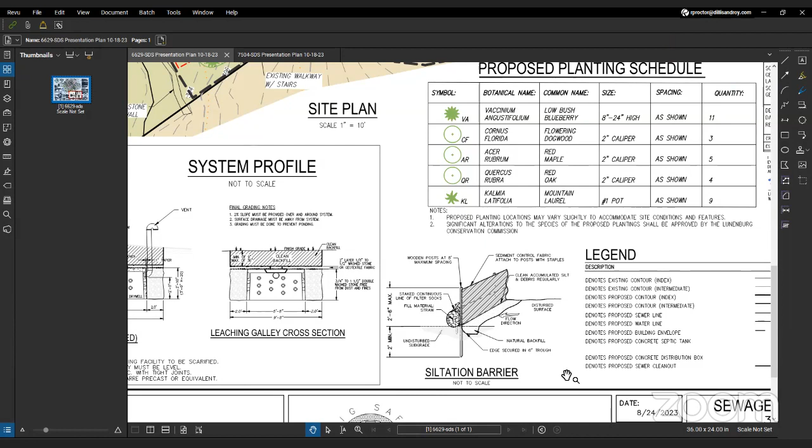And you guys have a DEP number now, right? We do, yeah, we had one prior to the last meeting. It's 208-1306, and their comments were addressed in the letter at the previous hearing. Very good, so I think I'm looking for a motion to approve.

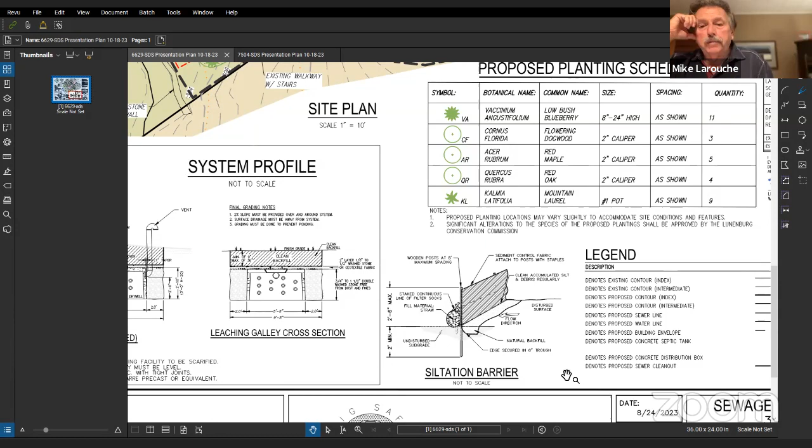Okay, well it looks like somewhere along the way we lost Rich Bursch. Oh, I'm back. Oh, you're back? Did you drop and dial back in? Yeah, the satellite must have gone over the horizon. Okay. I pin all of the commissioners, so it's easy to tell, I don't lose track of you if we have a lot of participants and you suddenly weren't there anymore. So okay, so we did have a motion by Mike Larouche and a second by Chris St. Germain.

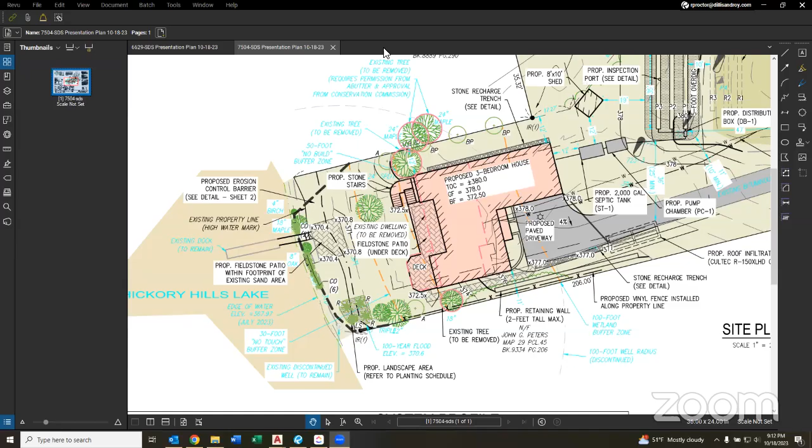On the previous site plan, we had 3 birch trees. For the project, we're proposing 4 trees that we're removing, outside the 50-foot to 100-foot wetland buffer. We had previously proposed 3 birch trees along the northern property line, where we're taking 3 of the 4 trees. And we had a landscape area down by the water with shrubbery to mitigate the other tree being taken along the southern property line.

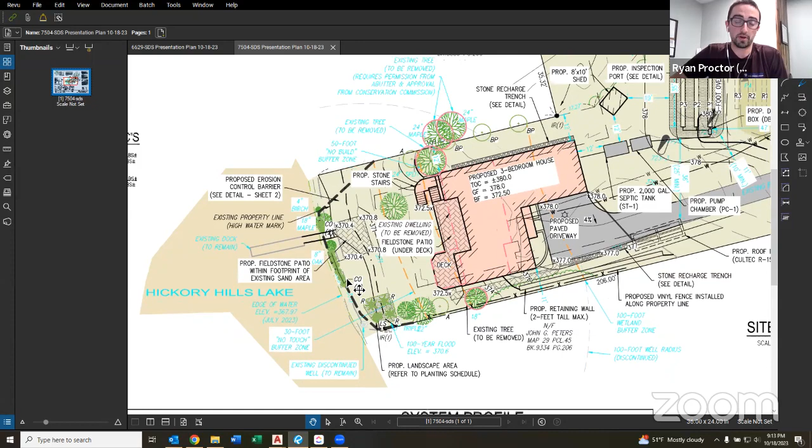Since then, we've added 2 additional trees within the 50-foot buffer. Even though the trees being taken down are outside the 50, we've added 2 shadbush on either side of the proposed house. We've also added button bush along the top of the bank for Hickory Hills Lake to provide additional stabilization and complement the existing shade trees right along the water. So those were the vegetation changes.

The only other thing I added, which was a comment by, I believe, Mr. Viviano at the end of the meeting, was to define the existing travel lane the applicants use to access the dock. Previously, if the commission remembers, there's a sand beach or sandbox area we're proposing to replace with a fieldstone patio, and a carpet leading down the slope to the gangway that leads to the dock currently.

To define that area and restabilize around it, we have 2 stone steps we intend to insert into the bank, so we're not doing any filling. That will define the walkway from the patio down to the existing gangway providing access to the dock. The restored areas, no longer the sandbox, will be planted with loam and seed or the landscaping we're proposing on top of the bank. Those are the only changes for this one. If there are any questions, I'm happy to address them now.

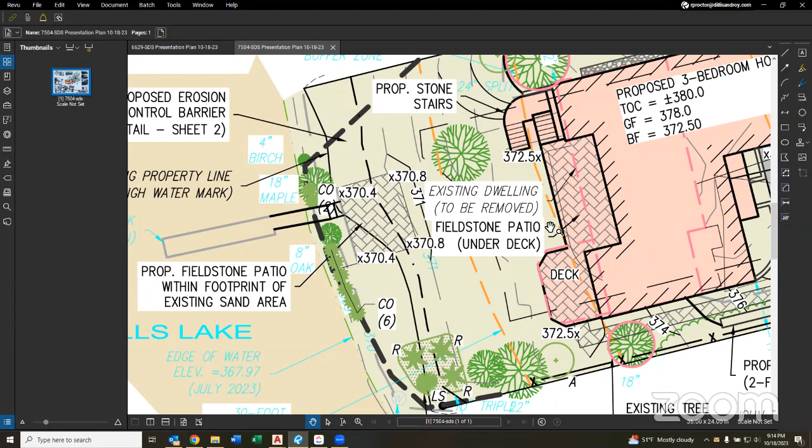Thank you, Ryan. That's consistent with the notes I had from the previous meeting. I'll open it to fellow commissioners for questions or comments. I'm not seeing any. Do we have any questions or comments from members of the public?

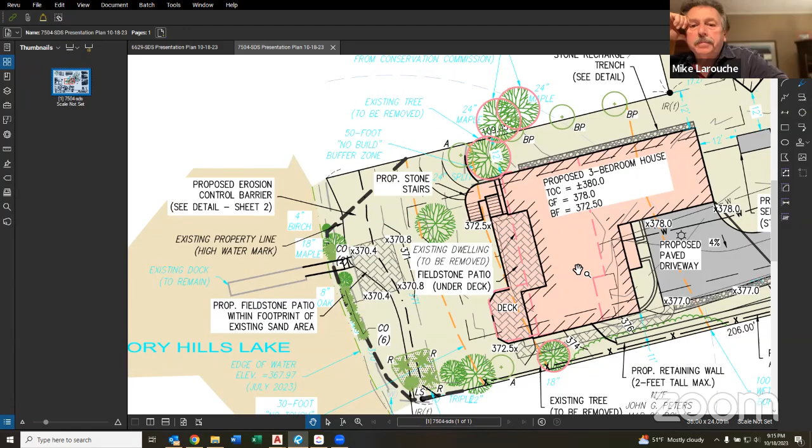I think I'm looking for a motion from my commissioners if they're so inclined to approve this NOI. So moved by Jeff. Second by Mike. Okay, original motion by Jeff and a second by Mike Larouche.

So I'm going for a roll call vote. Rich Birch, aye. Bob Pease, aye. Chris St. Germain, aye. Rich Tremblay, aye. Jeff Viviano, aye. Mike Larouche, aye. And I for myself. So that is to approve this NOI.

Thank you, Ryan. Yep, and thank you everyone for your time. Appreciate it. Good luck to the Charpentiers on this project.

So I have 441 Townsend Harbor Road on there. And Bob has been kind of rigorously going through our previous hearing meetings. I think the best thing for me to do is read this one in, Bob, and then for us to determine what we want to do for actions in terms of keeping this on the agenda moving forward.

Because I don't see anybody from this, nor have we in the previous two meetings seen anybody representing this on the call. So that's what I'll do.

Pursuant to Mass General Law, Chapter 131, Section 40 as amended, in the Town of Lunenburg Wetlands Protection and Municipal Bylaws, a hearing on an amended order of conditions by Nicholas Eaton for repair and construction of an existing deck at 441 Townsend Harbor Road.